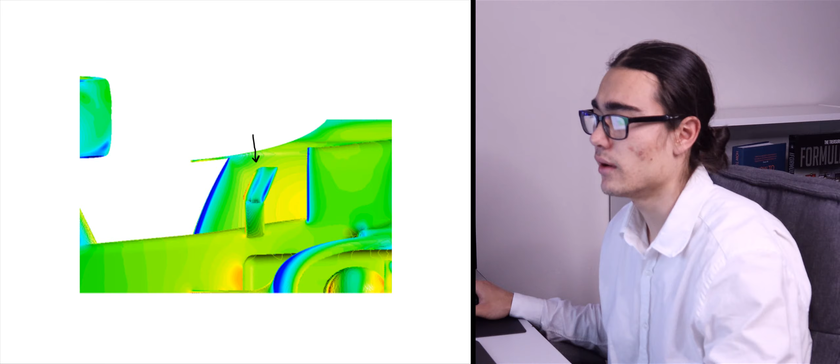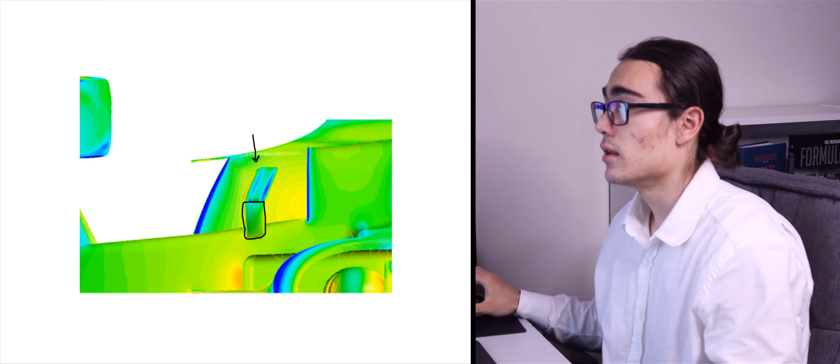Your mirror connection here has a bit more freedom to it. It obviously has to join on in a certain spot, but if you're looking to downwash over your side pod, you can 100% sculpt this structure to begin the downwash if you need to. You also have the ability to put a little stay on the back of the mirror to the top of the side pod, and there's a bit of freedom there too, so you could roll up a vortex which perhaps encourages some mixing down the side pod if you're doing the crazy downwash thing.

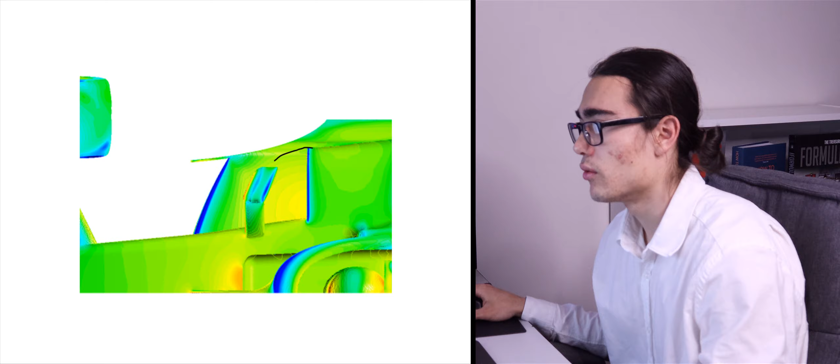Another thing to note here is the actual side pod itself can go quite a bit forwards like this - there's a volume box for that. You don't have to fill it, and some of the other 2022 F1 car models I've seen don't fill it. This could be potentially useful if you're minimizing your entry area and expanding, or if you've got some air you'd like to clean up a little before you begin to downwash it or move it around the side pod a little bit.

Another thing to notice is you get yourself a little windshield here, which you can use if you'd like, and we've seen this on each car. They've all got a little transparent shield in front of the driver, which deflects some air. Sometimes we see this on the cars, sometimes they actually take it off, and Merc and the Aston Martin have their cool little jagged one.

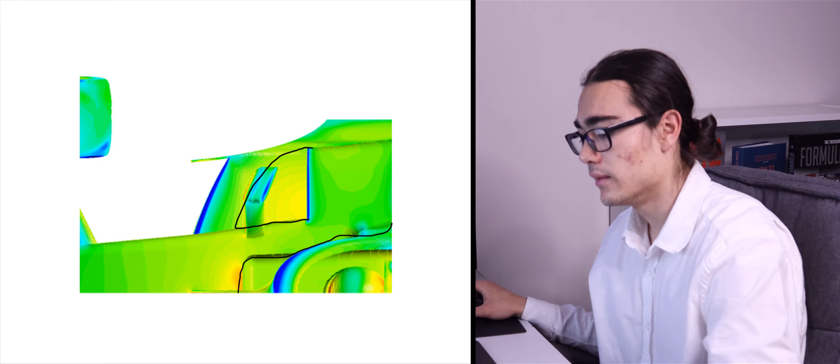One thing we won't focus on too much is the actual driver section. This is because my halo model and the general driver model around this region is pretty bad, so I don't think there's too much point analysing it. Furthermore, this whole top region of the car, especially up above, is really quite dependent on packaging - I mean the whole car is very dependent on packaging, but that section really is. So we can look at general airflow trends, but it's much harder when I don't know anything about F1 cars - unless you're an F1 team and you'd like to send me a model of everything except your aero surfaces, that'd be great. But yeah, I don't know what the packaging's like.

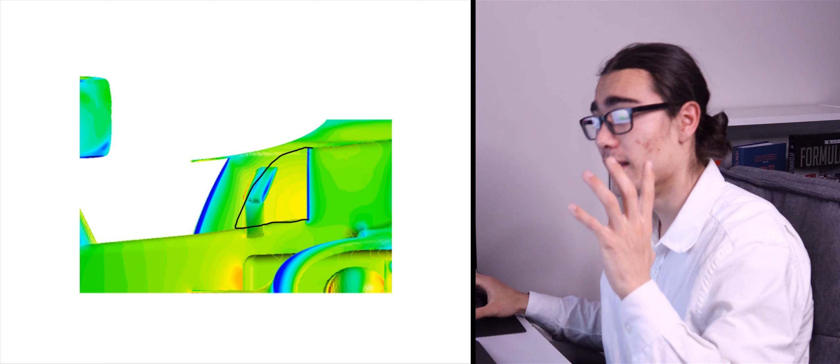Let's get into the actual exciting bit, the floor. Now I've drawn a line through the floor about there, because we're really going to be focusing on this section of floor today. I know the whole floor acts as one, but the philosophy of the floor changes a little bit in that region, so we'll start with that.

Now at the top, here's the regulation model, so you've got this box here which is bounded like this. That's the regulation model for the floor itself, and as you can see, it's quite limited in its throat region. You've only got a little bit of area to play with in there. You have a bit of a choice on how much expansion you can get, and the inlet area as well, you get a little bit of choice, and obviously the curvature.

The floor that I've got does start quite up, go quite flat, and then you have quite a bit of a kick - comes out and then kicks back up again, so something like that, which is probably what we'll see most teams do. I don't think it's very hard to use the extents of the volume in here. I think it's quite likely that a lot of teams are going to go maximum inlet, maximum outlet, lowest throat. It's going to be more so about what sort of curvatures they pick in those areas.

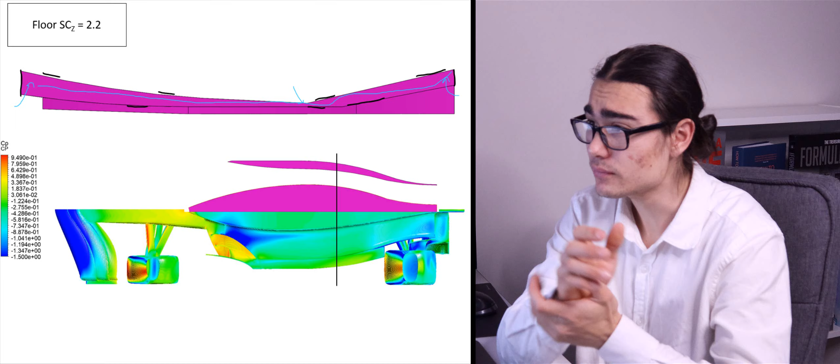Another thing that I've included here is the lateral expansion of the floor. As you can see at the back, this is just the floor, by the way, so not the fence model or the floor edge model, just the actual floor itself.

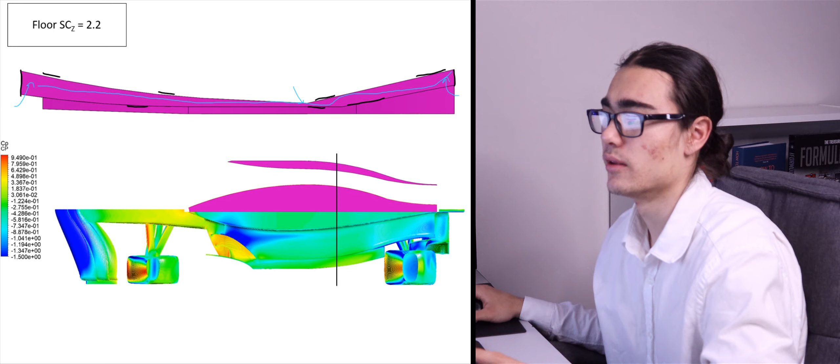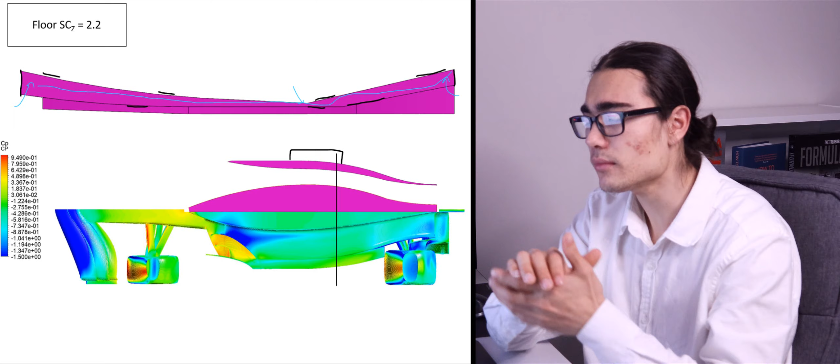The lateral expansion at the back is pretty much fixed. So while the teams now can't go very high with their diffuser, they go crazy lateral. This time lateral is fixed, but you can go quite high, which is under the racing get cars to follow each other policy. So in around about this region, you have a floor edge, what's described as a floor wing edge, and this is the region of the floor where you actually get two sections to work with. Everywhere else is one section. This basically means you can make some sort of a multi-element wing in that region, and this is quite obvious as to why you do that there, which we'll talk about a bit later on.

Now, if we're looking at the floor from a theoretical standpoint, yes, it's highly likely that we're going to want to maximize our inlet area there, so we just cram in all the mass flow possible. The thing that's going to restrict you from putting your inlet up very high is if it's so high that you separate off the leading edge, because you can't downwash into it effectively with your front suspension. You're going to be wanting to use your front suspension to downwash your front wing into that region. The lower angle of attack your front wing is, the easier it is to be able to push air into this region without separating off the leading edge.

Mass flow in this region, I think, is very, very crucial from a lateral standpoint and the vertical standpoint. These are two major parameters, I think, for downforce. The more mass flow you can push onto those fences in there, the stronger the vortex system in the car, the more downforce you're going to create. The challenge is managing the squirt in this region.

Now, the general philosophy of the floor is we have these fences in here. You're allowed up to 4 fences each side. There's a little bit of freedom with what you can do with them, but yeah, you're allowed 4 fences each side, and these push a lot of the tire wake outboard here. They expand a lot of this flow here, which is why you can see this light blue streak there. And their main role is to generate a very powerful vortex which rolls through the floor like this, and ideally I think would keep going throughout the floor like that.

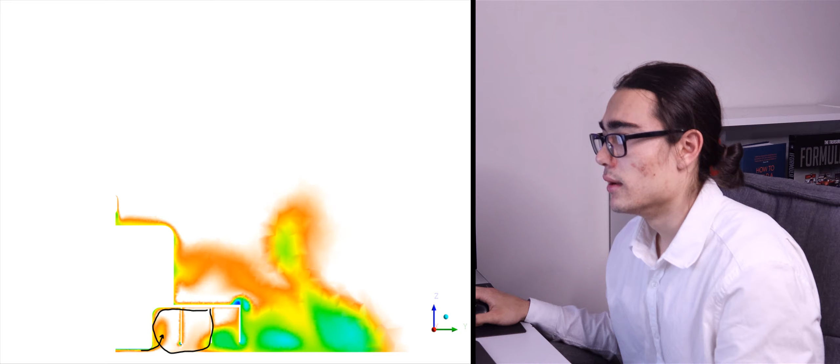And now what we're going to see is our wake here from our wheels get pushed outboard by our fences. So if I play through, there you go, you can see we've just pushed it out a little bit there as we begin to expand.

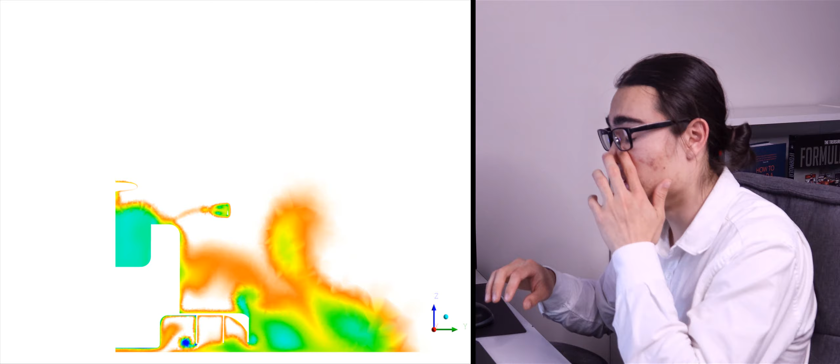Now I should note, I didn't think these cars would be that outwashy, so my refinement regions were probably a little bit too close to the car, so we're entering zones of quite coarse mesh, and typically when you have coarse mesh, low CPT tends to span a lot more quickly. So the modeling of the lower tire wake being pushed outboard, I think it gets pushed too much. This is purely my fault because I didn't think these cars would make as much outwash as they did, and I was trying to put maximum detail into the vortex floor roll-up.

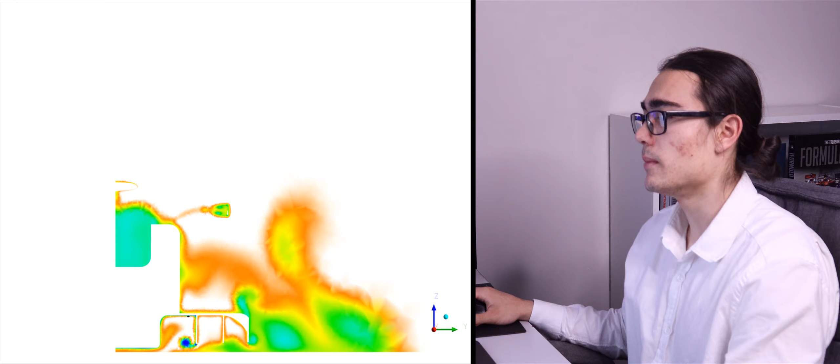Anyway, speaking of, you can see there's our Vortex Floor roll-up. Now I should quickly explain. We get 4 fences, including the outboard fence that we could use. You get up to a 50mm fillet, which you could use, but the fences need to be 50mm apart, for memory.

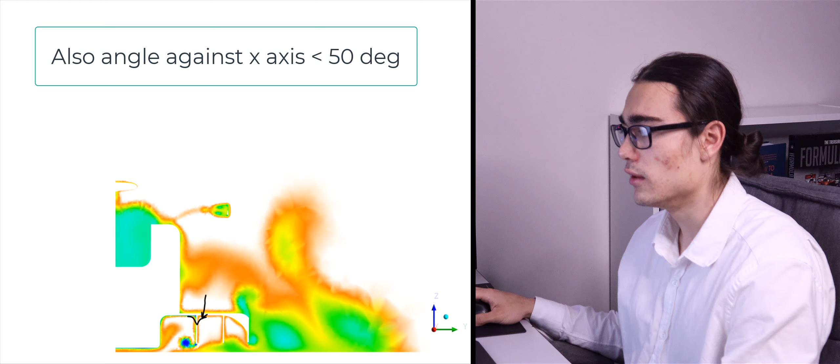And the fence is considered a fence even where the fillet is. So you might have two fillets there, in which case the fences would be too close and you'd have to move them apart. You also get a little bit of freedom, so I've got them vertical here, but you can move them up to 50 degrees off the vertical axis.

So I wouldn't be surprised if there's some sculpting up early on, whichever way, to maximize generation, and maybe even a kick at the bottom there, which will affect your vortex production as you're pulling air up around that way. Like that, roughly.

Actually, I think having the curve on is typically what you see, but to be fair, that's more on an in-washy type device, like a front wing or something. So I suppose we'll see. I wouldn't be surprised if there's a little curve to them there.

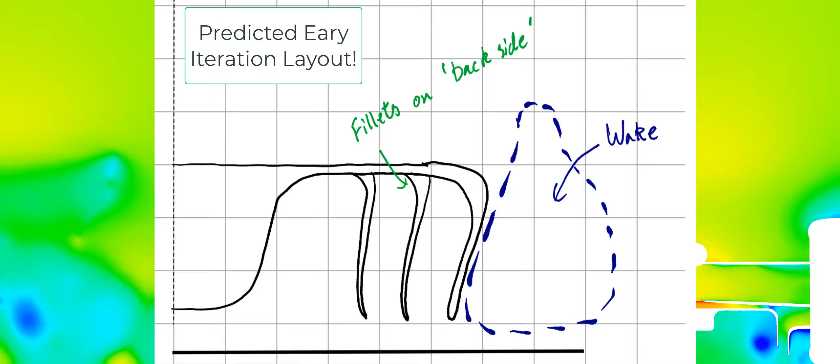Now, as I play through more, you can see the lower wake get pushed away more again, and we begin approaching the undercut. We've already gone through the mirror, and here is our big roll up there. We've got some losses here.

There would ideally be a fillet there, which would help out quite a lot. And now here's really our prime position of the floor, where a lot of this downforce is being generated. You can see how much happy, good quality air we've got in this region, and now let's really extract some performance from it.

Where else do we have happy air? Well, we've also got good air here. Bit of a loss off the leading edge here, which isn't great, but it is what it is. So let's use this air and this air to generate some downforce, and it's fairly obvious what we're going to do.

We're going to laterally expand this into our edge wing, where we're allowed the second section, put a wing there and generate some serious outboard loading. Now, to keep the car as simple as possible, I kept a flat floor edge, but you'll still see exactly what we should be seeing.

So I'll continue playing. I'll go back a bit and let you watch that again. I'll go back a bit and one more time. Okay, it's fairly obvious what's going on.

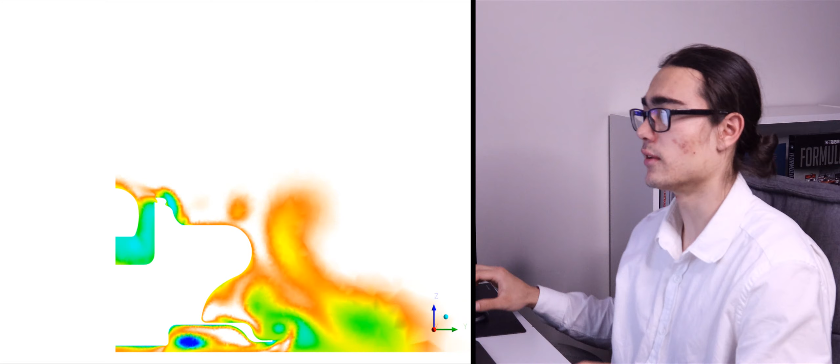We've got a lot of high CPT air here, a lot of high CPT air there, and we're going to outwash these down here and down there into this outboard section there. So I should show you again.

You can see we're already beginning to kick up a bit of upwash there, and you've got this little slug of high energy air here, which is really going to want to go down there. We're laterally expanding it from those fences so much, and you can see it's just moved there, and moved there, and moved there. So I'll come back a bit.

So on the top and the bottom, we're getting a lot of that lateral expansion. Now, one more time.

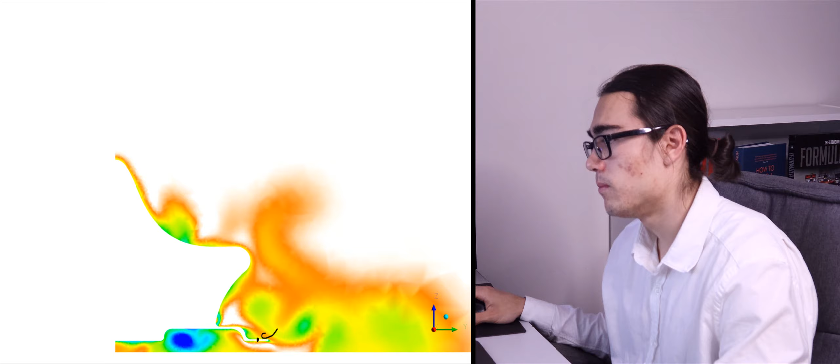Perfect. So what you've got here, you're laterally expanding so much, what you want to do is cut your floor there, get an element, and pop it in like that. This is something that we're very used to seeing, even on today's Formula 1 cars.

In this region of floor, maybe a bit more forward, sorry, we have massive lateral expansion, and you generate load on the outer edge of the floor, which hopefully makes people stop saying that F1 cars use vortices to seal their entire sections of floor, because this obviously isn't the case. If you got sliding skirts and put them on modern day F1 cars, you wouldn't cover the front sections because they generate so much lateral expansion and load as the air flicks up.

Now, in this situation, we're taking good quality air and using the undercut from the side pod to push air down in this region. Undercut to fillet first, and then side pod, as it widens out, we push air into that region to feed the slot gap. This would obviously be done quite cleanly.

In this model, it's quite chossy. And then we extract some of the high CPT air from the lateral expansion from the fences and generate some outboard loading there.

Before I talk about top side plate geometry and side pod geometry, I want to quickly mention why this is such a good idea. A point of drag is worth a fair amount in Formula One, so if you can reduce drag for the same downforce, you're going to do it.

So if they're perfectly aligned with the flow, they generate a force that way. Imagine we're in a yaw condition, a steady-state cornering condition, turning to the right. We're going to be seeing air coming in from the left-hand side. You'll notice this is the case a lot with steady-state cornering in Formula One cars, because the inside end plate vortex spools up more than the outside end plate vortex.

So we know this is the case, and what this is going to do is encourage more cross flow from the floor and power up the inside floor edge wing a lot more.

I think it's almost 100% that every team is going to have an edge wing on their car. Maybe somebody will have the wiggly thing we've seen on the Mercedes and the Aston, but they're going to have one of these wings, and I think optimization of these is quite important, and even some compromise for them, because they're a very drag-free device.

Not completely drag-free, because you're turning the airflow to use them, so obviously you can't have a device with no drag, but it's a consequence. You can use it because you've already done the work to the air beforehand, so you may as well use it.

And because we've got this cross flow in a yaw condition, you're powering up the inside one more, which counteracts lateral weight transfer, and also gives you a little bit of centripetal force in towards the corner from the drag force.

So there's a lot of small details, which is why I think this device could really be focused on—you actually generate quite a bit of load off it. But we can't forget that our main source of load is the big vortex coming off the inboard fence.

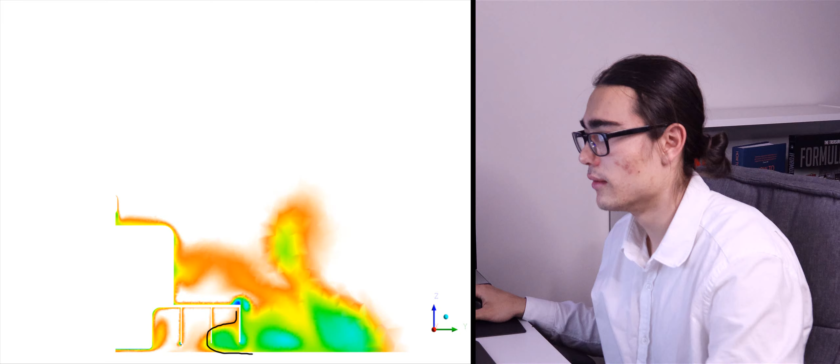If I go back up to our inlet, this is squirt. This is bad. If I got rid of that squirt and made a front wing which actually worked, or put on an old F1 car front wing, or did my own design, the floor would be considerably better. It's all about managing this squirt, especially in high yaw conditions, I think, for the cars.

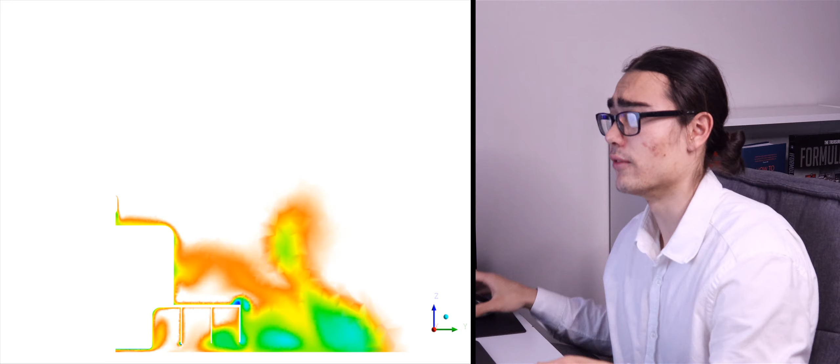Now, I did mention I'd talk quickly about the side pod. This is a very flat side pod. Also, for cooling, I didn't do internal flow here—I virtually opened it up and put in boundary conditions so we don't just have flow ramming in, and I've got flow exiting the back where it would normally exit. But I decided it's much better to put my mesh count towards the floor vortex system and tire squirt and stuff like that.

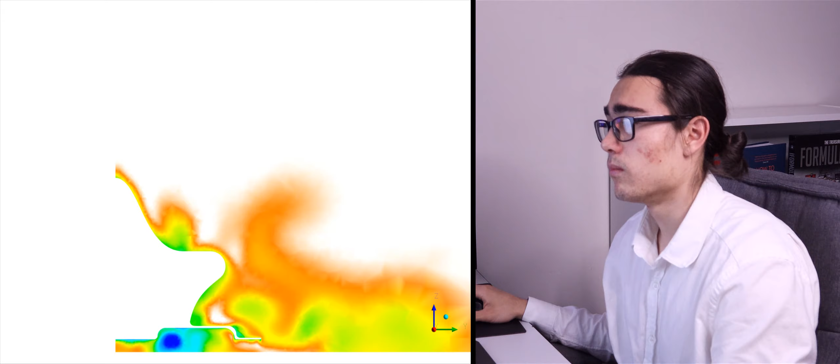Look, this is quite dirty—this is from poor geometry around the driver. If you kept this clean, you could do what the teams do today and try to pull it down, provided the rules allow it with the specific radiuses you need.

This would introduce more high energy flow at the rear end, help you with the beam wing, which is actually quite a powerful device in these cars, and that pumps the whole floor because you put a low pressure right there. But we'll talk about that in the rear section video.

One more thing with this vortex is the way that you string it up, I think, is going to be quite important. I was too aggressive with my vortex. If I come back to the original geometry, I think I was a bit too aggressive with this one—it gets very aggressive very, very quickly.

It's generated a lot of coefficient of pressure, but it also breaks down a lot quicker. By here, it's already broken down more. Here, it's going a bit stronger.

The point being, if you optimize this geometry, you'll keep it intact more for longer, and you'll have bigger gains throughout the whole floor. I think this is part of the reason why right in this crevice, we're not generating much load near the rear end of the car, because the vortex has gotten a bit lossy there.

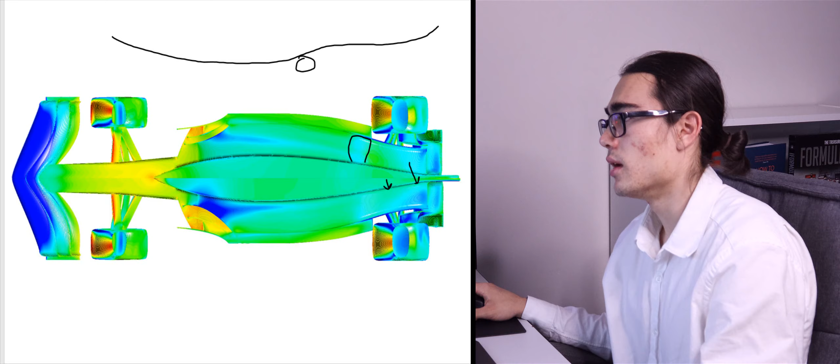And is acting a little bit like blockage in that region. You can also see the first kick in the floor, because the floor does actually have a profile where it goes in, kicks up a bit, and then goes again. This kick here is more powerful on that side than that side.

I think this is again to do with the vortex, and how the one on the lower, although it's producing a lot more downforce, is disrupting flow a little bit later on. So management of this vortex is very, very important.

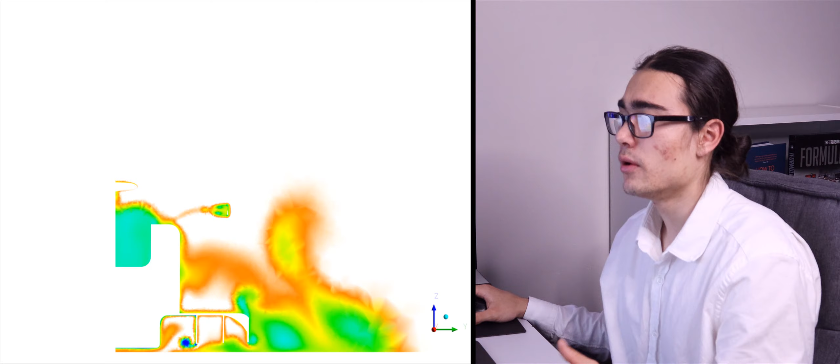If I play through the movie once more, you can also see laterally where it wants to go. It wants to bunch up and into that left side. I'll go back through once more - you'll see it rolls up and wants to bunch into that left side.

Now, I don't know if you want to put this outboard more. If you can, it's co-rotating with the vortex that will be coming in later on to help seal with the tire and manage squirt in that region. But we'll talk about that in the rear video. So I don't know if you want to try push it outboard more,

or if it's just naturally always going to want to come inboard. My guess would be to have it more in the middle of the floor, but that you're going to be compromising a lot of things based on how you can keep the vortex structure strong throughout the whole floor in all conditions, and how strong you can make the structure in general. I think you'll be compromising location for that, which is really the main downforce for the car.

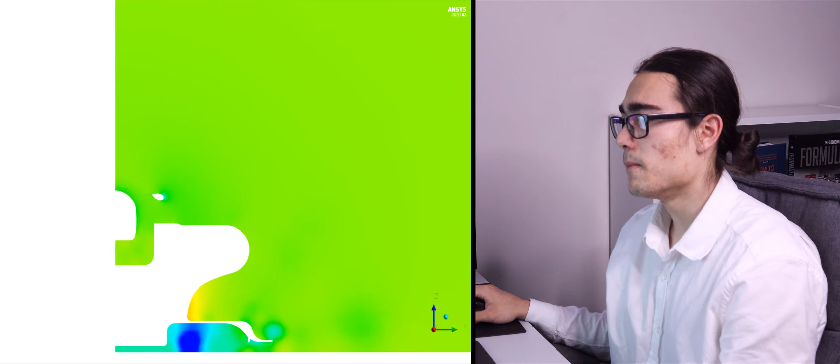Quick coefficient of pressure slice here. You can see how really strong this system is. As we move down the car, it's much less powerful. I think you could keep this going a little bit stronger.

One more thing to add is above the driver airbox region. In these regulations for issue 2, you did get a tiny bit of room where you could put a little shark fin to gain some rear end high speed stability, like a weather vane. These are small gains, I think, and more so for driver confidence and drivability, not something you really look at in a straight line CFD when there's already so many other fundamental issues with the car.

Also, the packaging up high, the packaging around the car - as I mentioned before, specifically up high, I have no idea, so I just made the most generic car I possibly could, and that's why I haven't really talked about it much in this section. This section has mainly been about the floor and the downforce we can produce, and as a general overview, power up that strake vortex.

It really starts though with the front wing. How do you manage the squirt? Do you have the squirt deflectors or the capturers really nicely positioned for all angles of steer and yaw? Are you managing the squirt when you have different rolls, because different amounts of inwash from your front wing will be coming in? And this is going to set up your package for the inlet to the floor.